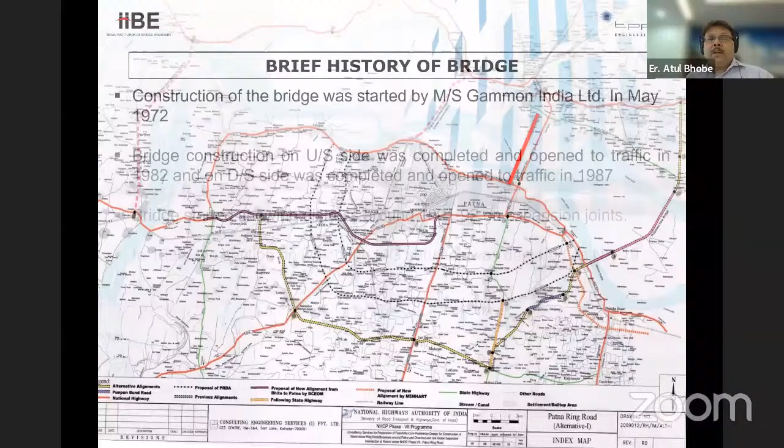So this is a brief history of the bridge. The construction of this bridge was started by Messrs. Gammon India Limited in the year 1972. The bridge construction on the upstream side - this was a 4-lane bridge, not a divided carriageway, but two independent superstructures - was completed and opened to traffic in 1982. It took 10 years. The downstream side took another 5 years. So a total of 15 years were spent in constructing the bridge completely.

Unfortunately, the bridge started showing distress around 1991-92, about 4 or 5 years after it was opened to traffic, immediately on the expansion joints to begin with. In 1996, the section on which the Mahatma Gandhi Setu lies was declared as National Highway 19. The maintenance of this bridge was with the state PWD till 2011.

Various reports on the state of the bridge were prepared, condition surveys were done, and external pre-stressing along with change of central hinge bearings in some spans was already undertaken at that time.

Serious defects and failures in one span, span number P44 on the upstream side, were observed in March 2011, and traffic flow had to be restricted because the span had undergone a complete failure. People could not use the upstream bridge, so all traffic was diverted to the downstream side.

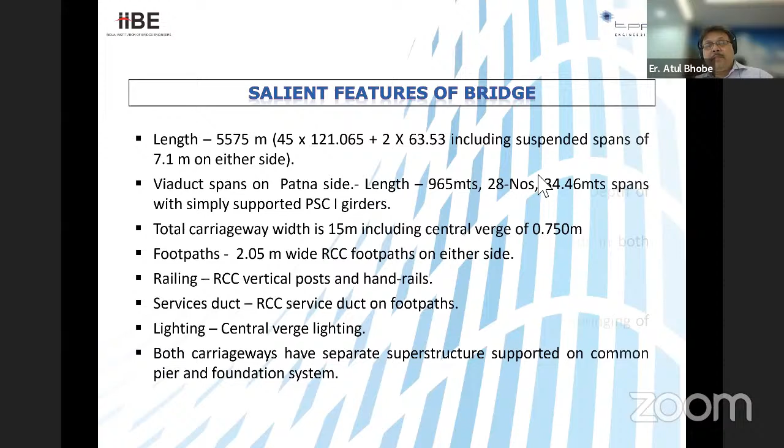The foundation system for this bridge was well foundations. The piers were hollow double D-shaped RCC columns. The superstructure, which was the most innovative part of this bridge, was in precast segmental pre-stressed concrete box elements.

The depth of the box, since this was conventional cantilever construction carried out at that time, varied from nearly 8 meters on top of the piers to only 2.16 meters near the free ends, where there were central hinge bearings. This particular design, with free cantilevers standing out and only a central hinge bearing at the end of the cantilever, was used in several places at the same time with similar spans and similar designs, but this one was one of the early applications of this particular design.

The expansion joints were finger type MS joints. For the moment, bear with me with the English, you will see pictures of these very soon.

The vertical clearance was nearly 11 meters at the pier location at the springing of the box, and of course it was much more in the center of the span because the depth varied from 8 meters to 2 meters. So you had almost 16-17 meters of vertical clearance in the central portion of the bridge.

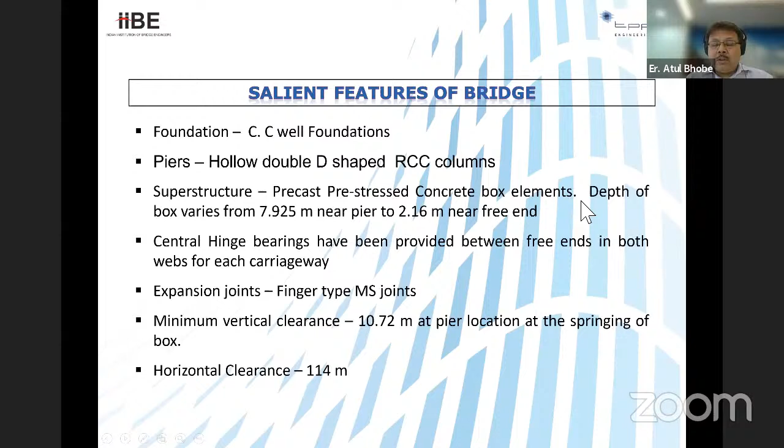The horizontal clearance was 114 meters. I mentioned that 121 meters was the span, so you had well foundations there, which occupied part of the space, giving a horizontal clearance of 114 meters.

So you had this 15 meter cross section, which had 0.75 meters as the central verge as part of it.

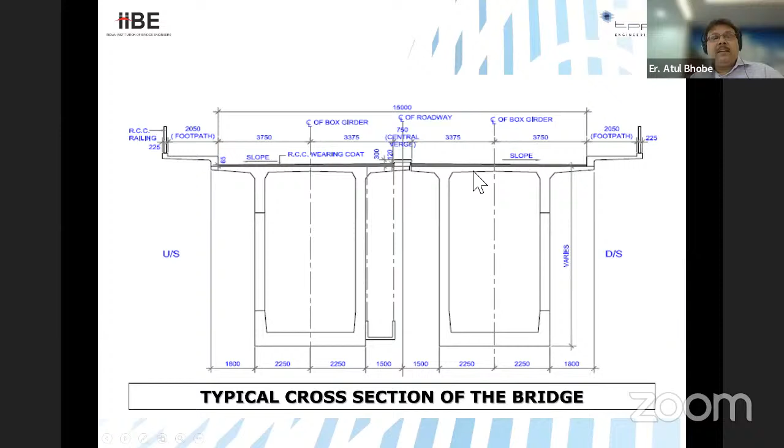The footpath, which sprang out from the box, was different from what we do now. Now, of course, we extend the slab all the way through and create a hollow beneath the footpath, but this was typically a fly-wing kind of footpath constructed in reinforced concrete.

That was the construction method. As I mentioned, there would be a free cantilever, and then a central hinge placed here, making it a propped cantilever kind of design, which made it quite economical.

Now we know that this is the most conventional way of doing balanced cantilever construction, using form travelers in cantilever construction gantries. You have the temporary tower with vertical pre-stressing holding onto the towers, the pier table as we call it now. The pier segment on top was cast in situ, and then the precast segments climbed out with the form traveler.

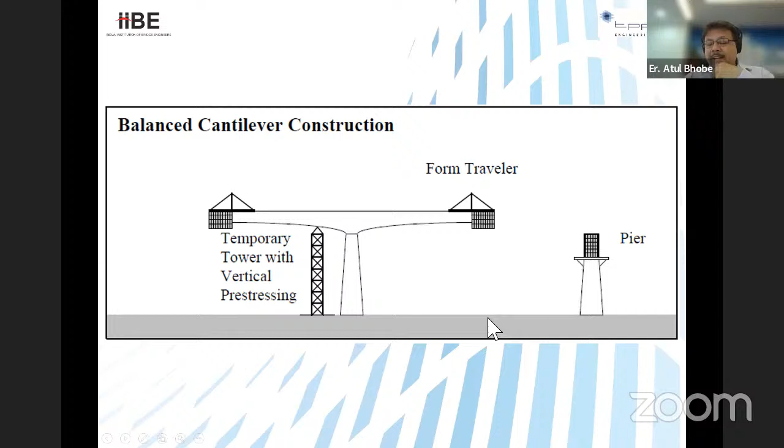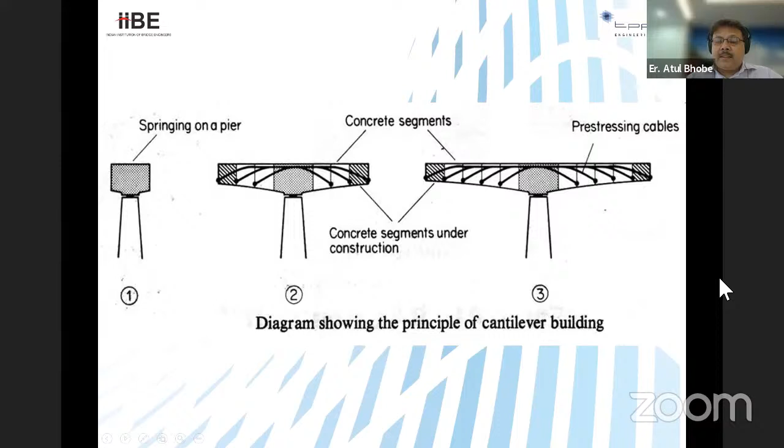That's the principle of the cantilever construction. Very simply put, you put cables in each and every segment so that you can hold the cantilever in place till you reach the end of the cantilever, and then you place the hinge at the center.

That's the theoretical functioning of the hinge. And like I mentioned, you have the propped cantilever effect coming into play. So you have lowering of bending moments, you have adjustment in the shears. So you get benefited in terms of economy in concrete and steel that you would use.

Now, what happens if that hinge does not really function as a hinge, which is where the problem on this bridge started? The hinge started giving problems. And this is what happens when the functioning of the hinge becomes not so ideal hinge condition.

You have differential reactions, and then your structure starts carrying more moment than what it was designed for, more shears than what it was designed for, and then it starts showing distress. So functioning of the hinge, deflection and moment, of course, this is pretty simple.

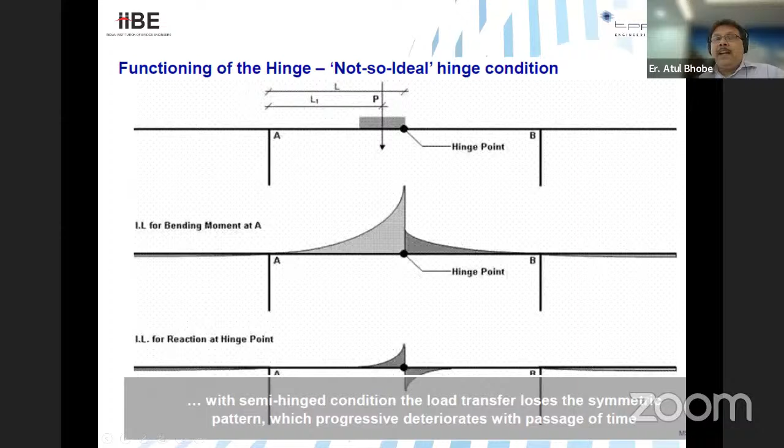And of course, if your hinge is not there, what happens is there is vibration on the structure, which can lead to failure. So just as an example, we tried to see how much a joint of the bridge would move, considering that there is an 8 millimeter movement in every 5 minutes due to a live load.

Movement in 20 years, if you consider differential settlement of 25, seismic effect of 25, loss of pre-stress 25, you will find that your cantilever travels 17 kilometers in a short span of 20 years.

Now that's quite phenomenal, isn't it? Nobody would imagine that your expansion joint is actually traveling that kind of distance in the life of the structure. Well, this is not even the life of the structure, it's just 20 years.

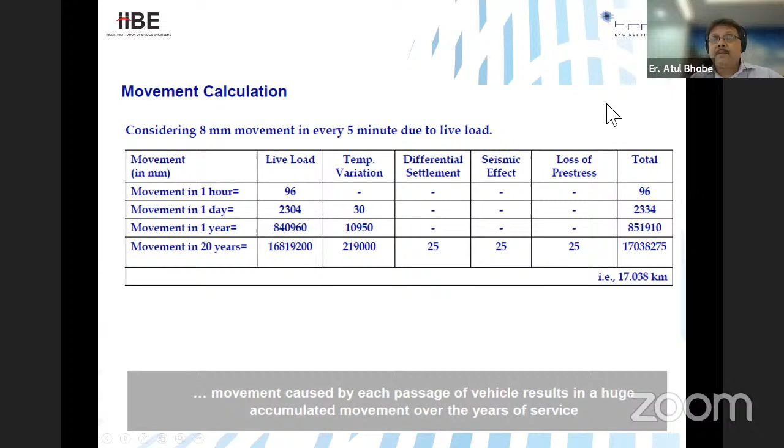So that was an eye-opener for us. I'm going to take you through condition survey and findings of the year 2012. What we found at that time, pretty shocking, as you will see.

So of course, the good thing is that because the bridge was only 15 years old or 10 years old, the as-built drawings were fully available with the department, which is generally not the case. But fortunately, the local PWD, the state PWD had the full collection of as-built drawings. They didn't have a collection of the designs, but fortunately, all the drawings were in good shape.

So to assess the existing status of the bridge, a physical inspection of the bridge was carried out. Now imagine you're carrying out the inspection inside of the bridge. The bridge is 5.6 kilometers on either side. So you have to inspect 12 kilometers of the box inside of the box. And what we found inside the box was pretty shocking.

There was water accumulation at a lot of places. There were all kinds of rubbish lying inside the box. Sometimes the boxes were stinking because of the water accumulation and so on and so forth.

Also, some of the boxes were cleaned because they were already externally pre-stressed. The work was going on. And so they were cleaned because of the contractor who was working on the external pre-stressing.

We had to assess the traffic plying on the bridge. And remember, like I said, the bridge was only open for half its width. So all the traffic was plying only on this part. Heavy vehicles were banned on the bridge. So they had to take a detour of almost 100 kilometers to go from North Bihar to South Bihar.

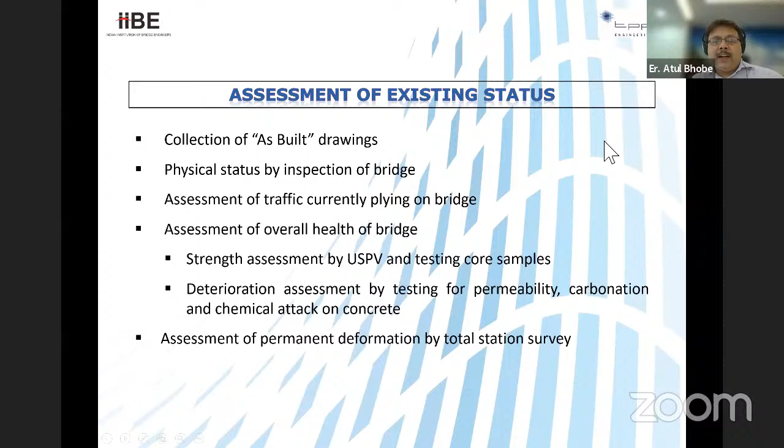And the assessment of permanent deformation was done by a simple total station survey because all the cantilevers had to be checked for permanent deformation.

This was the status of the as-built drawings. As you can see, they were all blueprints. At that time, you didn't have AutoCAD, you didn't have digitized drawings and so on and so forth. So you had blueprints of almost all drawings. And we created a digital trail, a digital archive of all the drawings that we could find, so that this is now available for posterity in the ministry.

We gave them all the drawings fully digitized and archived in a database. Of course, now at this stage it is of no use because the bridge has undergone replacement of superstructure. So the drawings are there now only for history, for people who would want to see how bridges were built in that time and how this bridge was built in its earlier avatar.

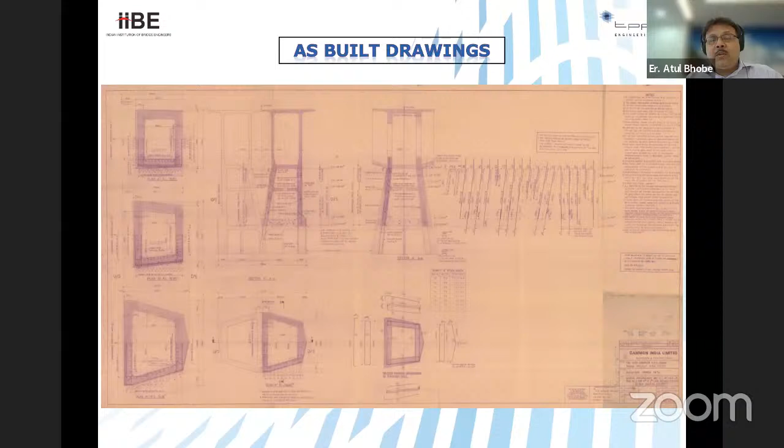So there you have it. That's the substructure and foundation details. And you will see that all the reinforcement details, pretty much everything you would need, a bar bending schedule, everything was available in good condition.

So while inspecting the bridge, condition survey of the bridge, we had to check for serviceability, damage to components, visible signs of distress, closer examination of components which indicated visible signs of distress, and of course documenting the status by taking photographs and doing video shooting.

So how did we do this? From the deck top, inspection of wearing coat, railings, median footpaths, service ducts, and light poles. This is obvious. From the ground, for conditions of piers, well cap, and box girders.

From suspended platforms for selected spans. So we randomly chose spans and we had suspended platforms placed there. We had no mobile bridge inspection units at that time. Of course, the Bihar government did have 2 units available, but they were almost defunct. So we had to make do with suspended platforms.

And like I mentioned, we walked the entire 12 kilometers inside the box, a pretty harrowing experience, and I'll tell you why. We had ladders and scaffolds erected inside the box so that every square inch of the box could be inspected. Central hinges of all the spans were also checked and inspected.

The exposed deck slab portion where the wearing coat was removed was also inspected. So we had wearing coat removed in certain locations where we had a doubt about the deck slab portion. Expansion joints and deck slabs near the joints were fully inspected, and portions of the box from inside showing visible signs of distress was further examined.

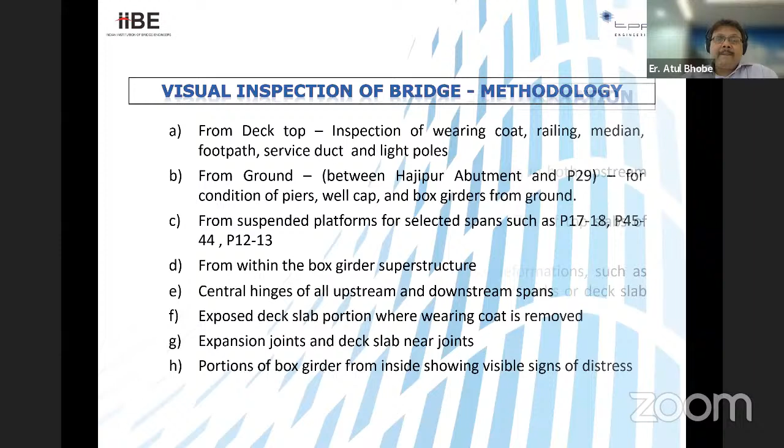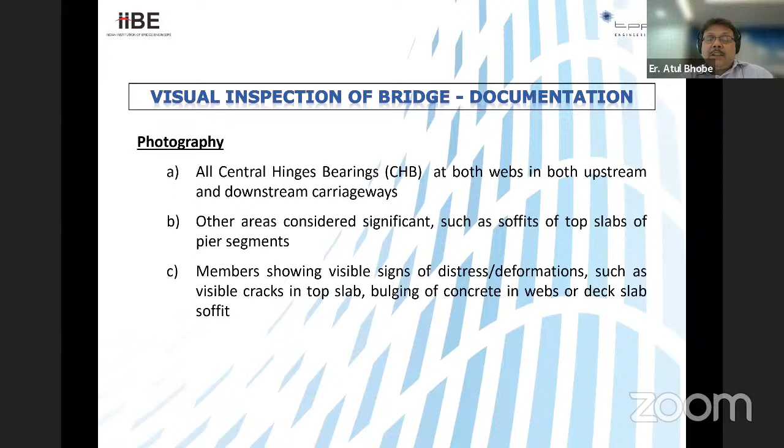So while documenting the details, all central hinge bearings at both webs in both downstream and upstream carriageways were documented. Other areas considered significant, such as soffits of top slabs of the pier segments, members showing visible signs of distress, deformations such as visible cracks in top slab, bulging of concrete, deck slab soffit, etc., were all photographed, and this was made available. In terms of video shooting, all expansion joints were shot.

Video shooting was done. The railing on both sides of bridge in minute detail was also captured. And central hinges in these particular spans were captured because they were showing large distress and the spans were showing large deflections.

Now I will show you a few pictures of what was.

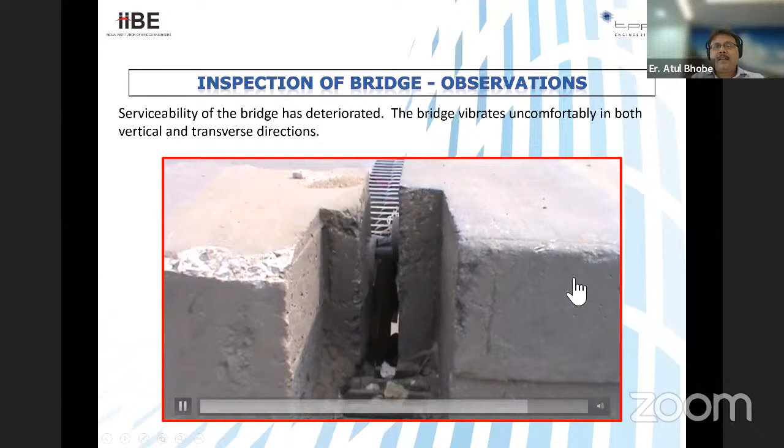As you see, this was just a picture of this expansion joint on piers 41 and 42. If you see the movement of this span, this was one of the better behaving spans. It was moving only by 10 to 12 millimeters. The hinge bearing here had nearly failed, and the span was dropping down, and the vibrations were uncomfortable when you stood here. And of course, remember that heavy vehicles were banned on this bridge.

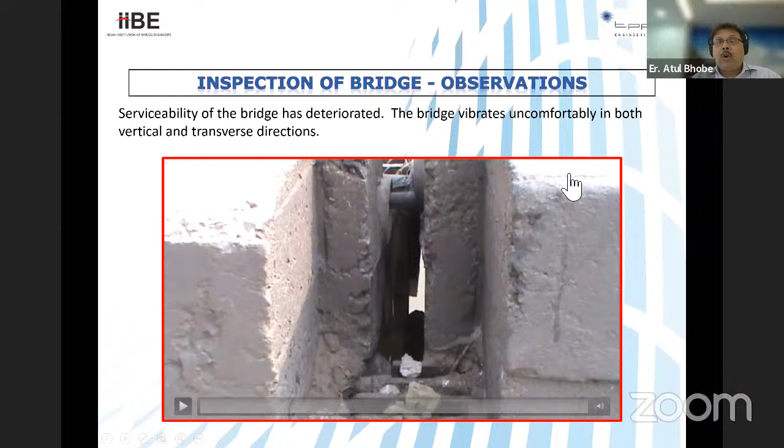So you saw only motorcycles and light vehicles crossing the bridge, and the deflection was already very, very severe when you stood on the cantilever. So this video just demonstrates to you the level of defect, of the serviceability of the bridge. It had deteriorated beyond acceptable limits.

That's the status of the central hinge bearing. Now, this is the plunger, and you see this is the base plate of that central hinge bearing. Many of these were seen to be broken or tilted beyond repair. It was impossible to repair these bearings because you have to take care of almost everything.

So this is, you can see, the expansion joint between piers 18 and 19 on the upstream side. This is the right-hand side carriageway, the carriageway right side hinge. So you can imagine documenting hinges of this. And why I said it was a nightmare walking inside the boxes, because the boxes were vibrating uncomfortably when you used to walk inside the box.

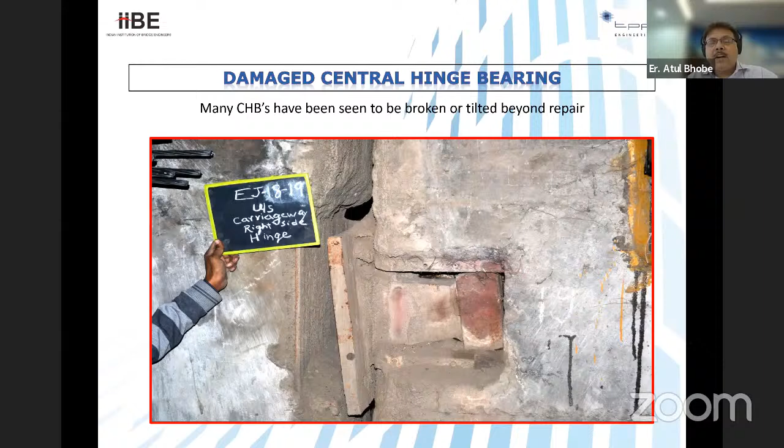The soffit of the box was in the shape of an arch because it went from 8 meters to 2 meters. So you are already doing something like a huge mountain climbing, because in 100 meters, you are climbing 6 meters. It was pretty uncomfortable doing the inspection.

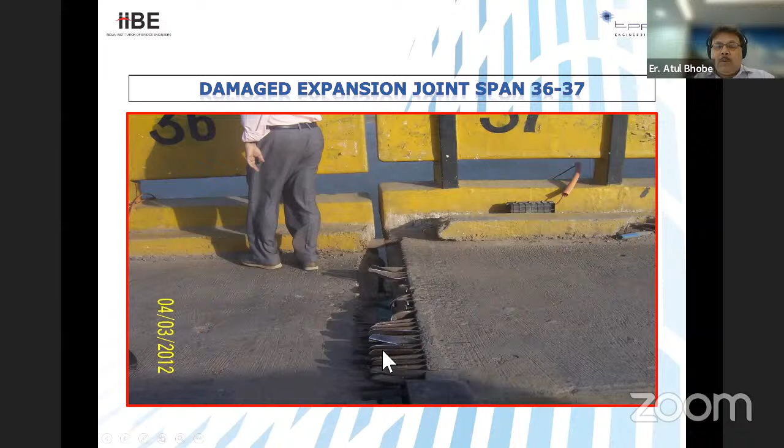That's another span, 36, 37. Now imagine what happens when a vehicle comes from this side and traverses from left to right. A lot of cases of puncturing of tires has been reported on these bridges before we started working on this.

The gap between two slabs, you can see the gap here on the curve. It's nearly 50 millimeters, and heaven help the person whose bike hits this kind of an obstacle on the bridge. This was happening at every expansion joint location. Now this is just an example, 36, 37 is the joint number.

This is what had happened to railings on both sides. Because of the excessive tension that got transferred to these railings, the railings had started to develop cracks. The vertical posts as well as handrails had cracked beyond repair. The railings were broken, they had fallen off into the river. You see these gaps created because this is where the post was and the railing fell off. So here some bamboos were attached so that people don't fall off the bridge.

On the footpaths, you see these suspended platforms placed, which were being used also for external pre-stressing by the contractor. Some of these holes we later used to put our own suspended platforms so that we could inspect the bridge.

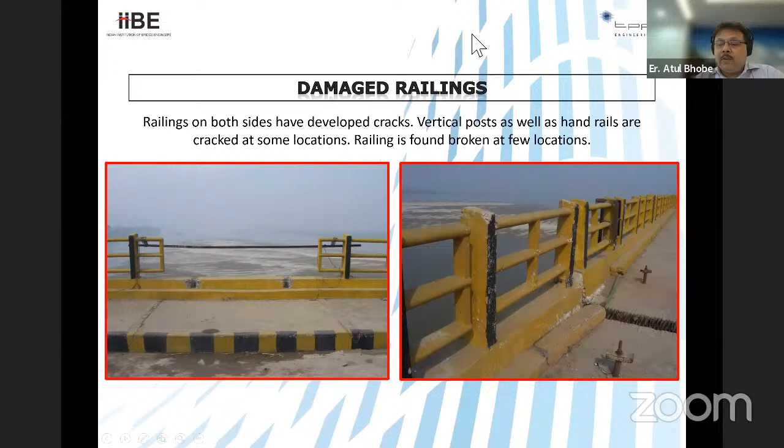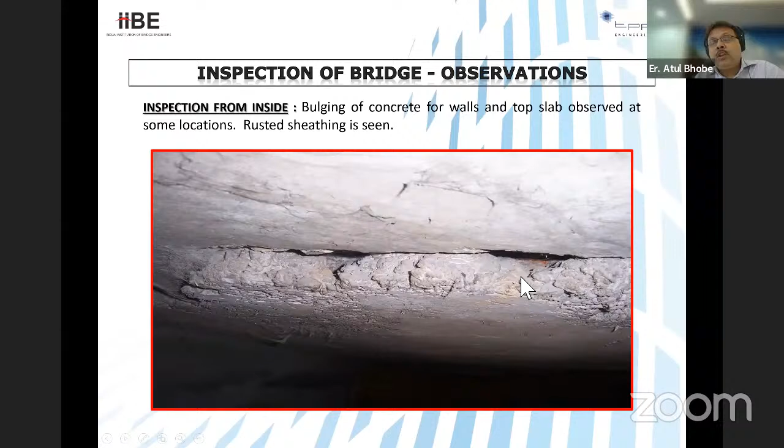Some of the things that we saw on the inside: there was bulging of concrete for the walls and top slab, rusted sheathing where you could see the rust spots, and in some locations the gaps were so large you could put your hand through and touch the cables and feel the cables moving. It was that scary when you went inside.

You see this exposed sheathing which had completely rusted by the time we came into picture. Some spalling had started to take place, and it was pretty scary. Once you started to go inside, you see the water marks, so leakage was happening at these locations. And mind you, this is not the location of the joint between two segments, this was on the top slab of the segment. So it was pretty scary.

For the central hinges, the vertical plates behind hinges were seen detached from concrete and hanging in a slanted position. I showed you a picture already. The vertical plates at a lot of locations had sheared off and torn off from the bolts. Plungers had cracked, and damages to plates below the plunger and to concrete was extensive also.

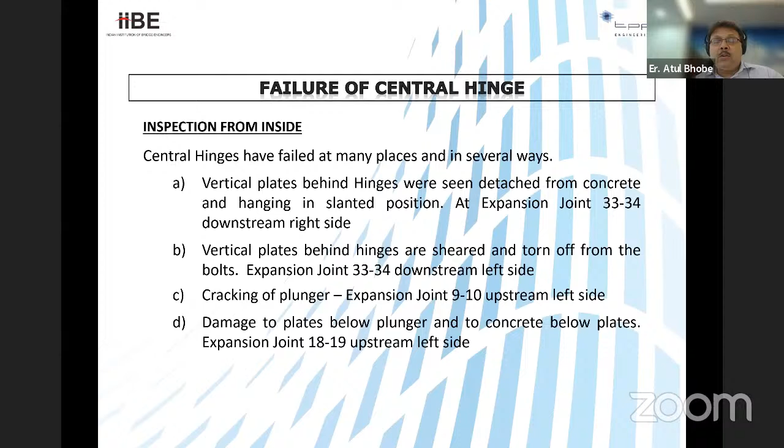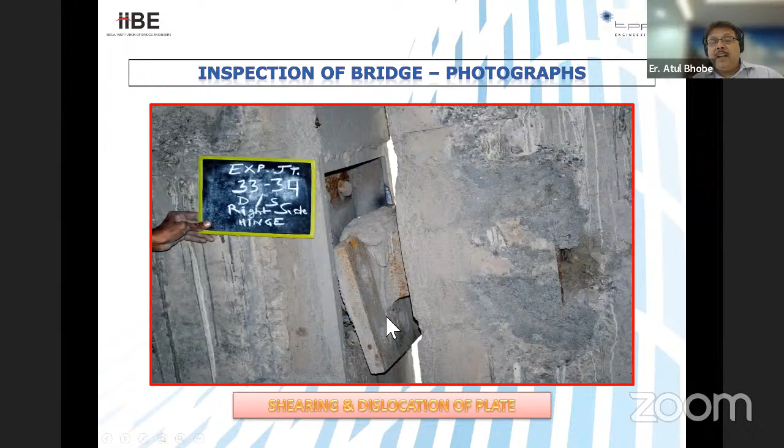That's how it looked. The plunger, the plate has completely come off. The bolts have sheared, the plate has completely come off. It's a dysfunctional central hinge bearing. That's another one that is tilted, and the plunger is still there, but it's not functioning anymore because the bolts have sheared off.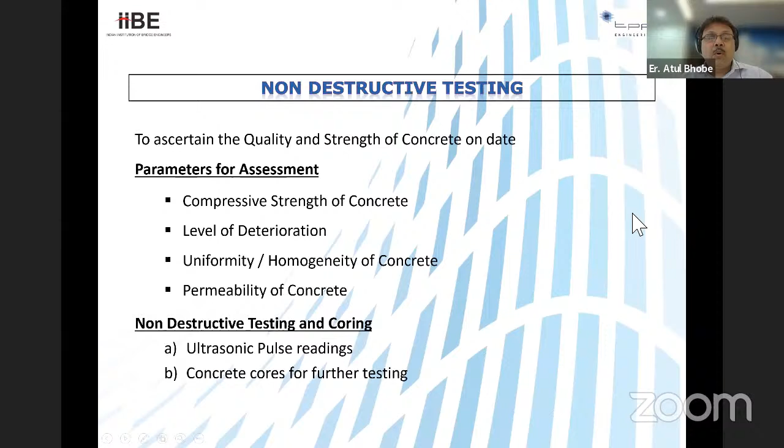Now, of course, I'm not going to talk too much about the NDT that we did, but suffice it to say that a lot of ultrasonic testing, concrete cores, et cetera, was done to ascertain whether the concrete at least had its strength or not. That's a sample of what tests were performed on a span.

So what we found, surprisingly, is that the concrete, which was 30 years old, was still in fairly good condition. The results were in the acceptable range. The core strengths also corroborated what the UPV was showing. Only surface carbonation was observed, which was also considered acceptable. So all in all, the concrete by itself had not failed.

pH values were showing strongly alkaline concrete, offering excellent protection to reinforcement steel. Chloride content was much less than permissible, with very low chloride ion permeability. So as you see, the concrete was good. Chlorides and sulfates in concrete were below permissible limits with very low chloride ion penetration. The concrete is alkaline, uniform, and of okay quality. Carbonation is limited to the surface, not really transferring inside. The concrete strength was unaffected even after several decades of use.

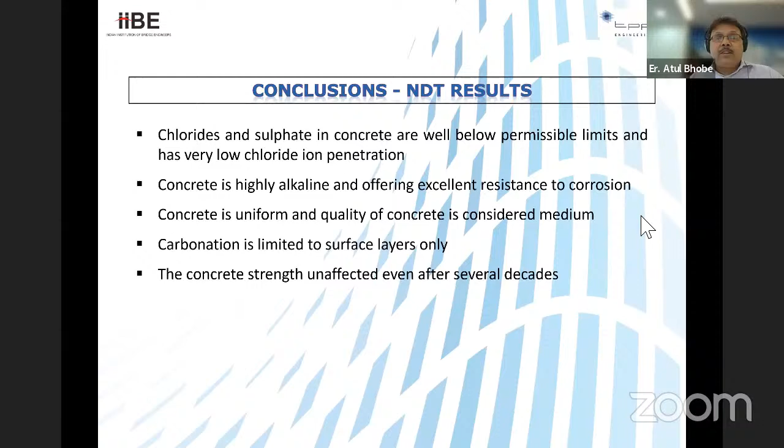There were no foundation settlements. Fortunately, we had the as-built drawing, so we knew the levels. We cross-checked these and there was no change in those levels. Abutments and piers also did not show any visible distress. We also checked the concrete quality and found it okay.

The superstructure, unfortunately, showed considerable deflections, although the condition of concrete appeared good. The central hinge bearings were damaged beyond repair. Signs of imminent failure of hinges were seen in many spans. Expansion joints were also damaged in many spans and separated due to relative deflection of adjacent spans, and corrosion of sheathing ducts in the deck slab was observed in almost all spans.

So regarding the failure of the central hinge, as I showed you earlier, the central hinge is supposed to take the loads of the SIDL and vehicular live loads. The dead load deformations are presumed to have taken place before the hinge is installed. So probable causes for failure were defective installation, or fatigue due to repetitive loading and movement of the hinge under live loads. Remember, this was one of the very early applications of a central hinge design in India — one of the most innovative concepts at the time it was implemented.

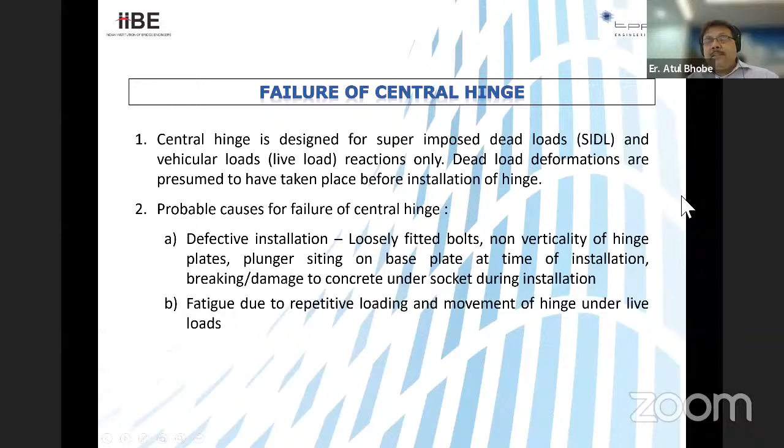Of course, there were other reasons: quality of material, design of the hinge itself, actual deflection being in excess of the design value, deflection of girder due to loss of pre-stress — and we now know that the loss in pre-stress was always underestimated. The last point was that overloading on the bridge could have caused excess load on the hinge, but this could not be corroborated because when we went to the bridge, there was no overloading, as no heavy vehicles were permitted. It's not just one factor, but a combination of all these factors that could have contributed to the failure of the hinge.

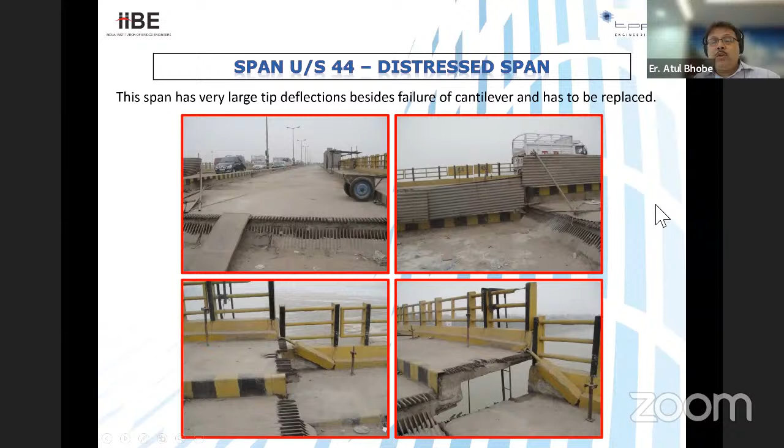Now, the distressed span number 44 — what could we do with that span was the question that had to be answered. This span had large deflections besides failure of a cantilever which had to be replaced. So the first thing we said is that we had to deconstruct the span and then reconstruct it. This was one of the solutions we were looking at.

A segment launching girder would be erected over 2 spans and supported on pier segments, so the girder had to be 240 meters, not 120 meters. Each segment would be strung by HT bars and trolleys supported in launching girders, and after de-stressing the original cable, the segment would be cut loose individually and removed. That was the plan to remove this span, since we decided it had to be removed — we had to re-girder this span. So the answer was to erect a 2-span launching girder, or de-launching girder. There you have it, a 2-span de-launching girder.

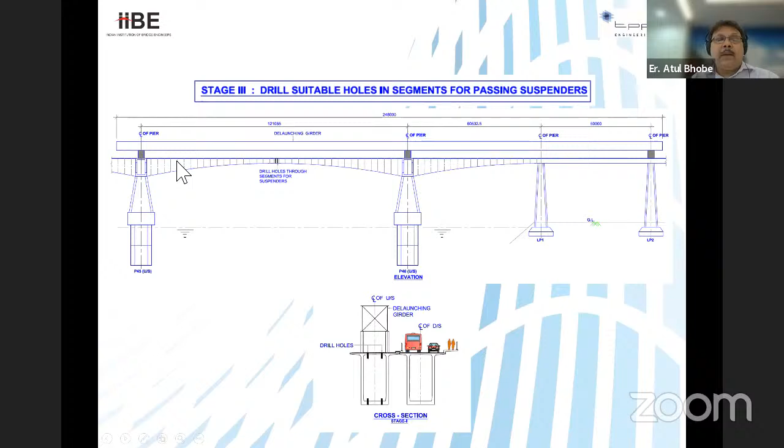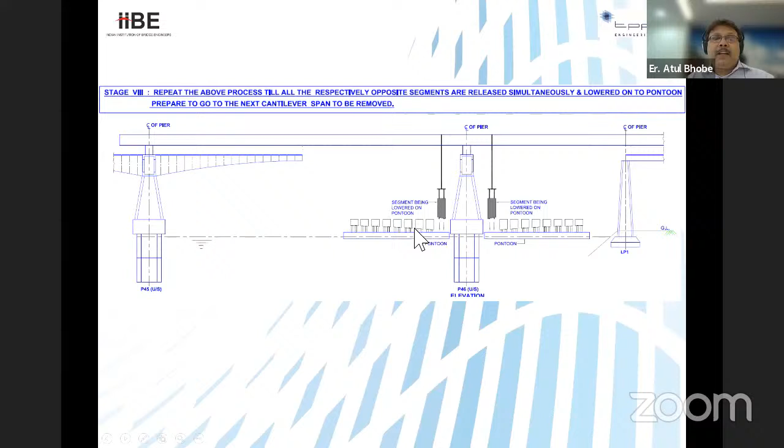We would drill holes through the segments for the suspenders to be provided. We provide suspenders, following an exact reverse process — instead of launching the girder, we are de-launching the girder. So you would do all the steps in reverse, as you would do today to launch a segmentally constructed box. Then the idea was to lower them onto pontoons and remove the span completely from its location, then move the de-launching girder to the next span and remove that span as well.

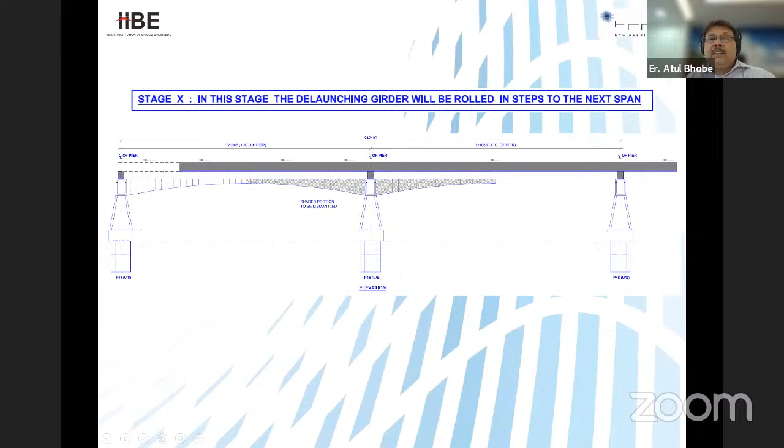We would repeat the same process for all spans. Once the concrete was removed, the idea was to place a truss on top of the already removed box.

Here is the crux of the problem. How would we construct this span? These were the several options we had. The first option was the do-nothing option, where individual segments which had been removed could be reused, or if found unfit, discarded, and only those segments which could be reused, plus new ones cast for those discarded.

This was one solution: newly designed low relaxation cables. Remember, this bridge was designed with old wires and strand systems, so low relaxation strands were not available at that time. We said if we used newly designed low relaxation cables, we could insert those and use gluing with current technology, such as epoxy gluing of segments. Discarded segments could be lowered on pontoons and new segments lifted up from there. But this had a major problem.

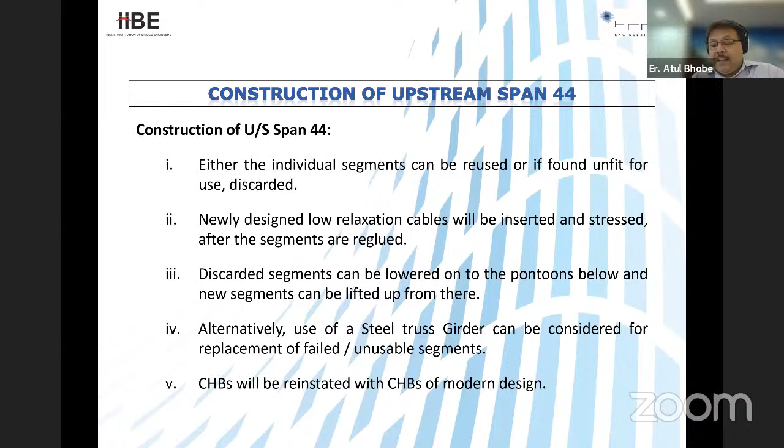One of the problems was that the amount of time this would take would be enormous. So we said if we could use a steel truss girder for replacement of these particular spans, we should and could do it. The central hinge bearings for all the remaining spans could be reinstated with central hinge bearings of modern design. This was the first thought process for the distressed span only.

That's how it started. Then the question was, how do you replace all the other spans? The first thing to bear in mind is that when replacing these spans, we had to consider the serviceability of the bridge and the structural safety of the bridge components which were in distress.

With these two points in view, we started looking at alternative solutions. Since the deflection of most spans was considered to be in the elastic range, we said it was desirable to reduce the load to reduce the deflection as far as practicable. For immediate relief, we could do two things - measures that could be implemented immediately without much difficulty and result in much needed relief, since the structure was already highly stressed at the time we started looking at it.

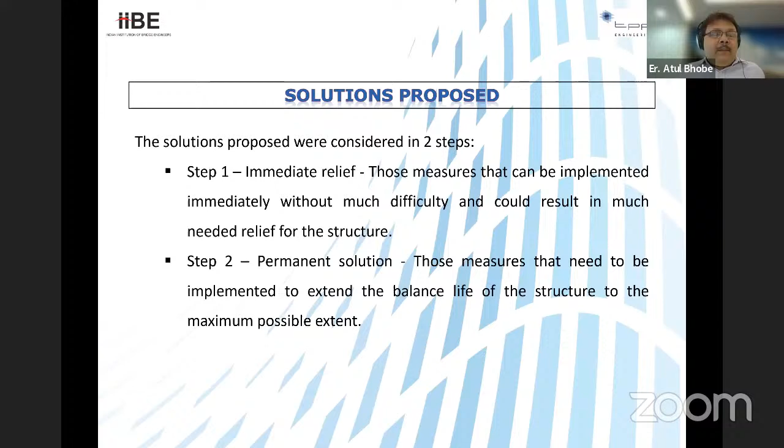Then we had a step 2, the permanent solution - measures needed to extend the balance life of the structure to the maximum possible extent. Everybody agreed that even though the design life of the bridge was say 70 or 80 years at that time, the bridge was not going to reach its design life. So the idea was to see how much we could extend the balance life. At that time, there was no proposal of a new MG Setu, Kachi Darga bridge, or Ara Chapra bridge. The whole solution hinged on repairing and putting this bridge back into service as fast as possible.

So what do we do to provide immediate relief? One solution was to replace the existing 110 millimeter thick wearing coat with a simple membrane and 25 mm thick mastic wearing coat. This would give substantial relief in terms of stress from the superimposed dead load on the span. Also, to reduce dead load, we suggested demolishing footpaths and railings for all spans.

Instead of RCC railings, we put in place metallic barriers which were lighter, with anti-crash barriers of the new type. And we channelized traffic to the center of the carriageway by placing bollards so traffic wouldn't travel eccentrically.

We opened both carriageways to traffic, with only one lane on either side operative, putting the bridge back in service with divided carriageways available to traffic. With some restriction and policing, this was agreed by the local administration. This could be done even before implementation of any other strengthening measures, and it would be easier to implement strengthening measures once the superimposed dead load was reduced.

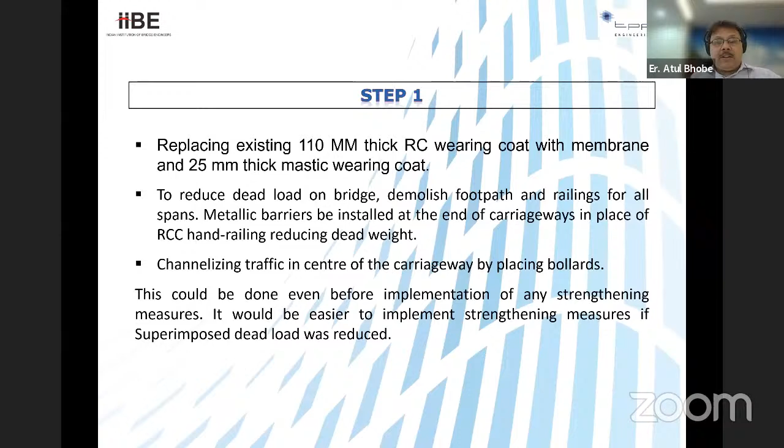This was one of our early recommendations. So that's how it would look. You would remove the two footpaths that were cantilevered. They were adding dead load to the bridge, and an eccentric dead load at that, and replace them with simple anti-crash barriers, steel anti-crash barriers, and then reduce the thickness of the wearing coat. That would reduce a substantial amount of weight. That's how it would look with these bollards.

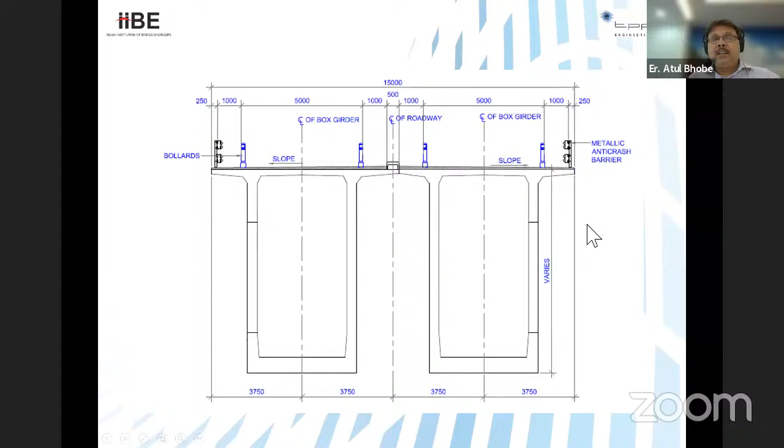So you had a 5 meter carriageway left in place. You had 1 meter on either side which would be defunct, and we would use only 5 meters. So one lane of vehicles and maybe 2-wheelers or 3-wheelers could use the bridge simultaneously. So we had 10 meters of carriageway available.

So one of the immediate relief advantages was a reduction in superimposed dead load by almost 2.5 tons per meter, leading to a bending moment reduction of nearly 4,500 ton meter, which was 10% of the total bending moment. So the reduction in stress was of the order of 20 kg per cm square - a substantial reduction in stress. Also, it would reduce eccentric loading and transverse vibrations. The video I showed you was not perhaps very clear, but the span was moving up and down and in the horizontal direction as well.

The disadvantages of this were the reduction in effective carriageway for traffic, and traffic diversion would be needed during implementation. This was one of the most critical items for the local administration.

We came to permanent solutions, and like I mentioned, we looked at several solutions for this. One was replacing the central hinge bearings with modern design central hinge bearings and externally pre-stressing the spans which had not yet been externally pre-stressed. Almost 40-50% of the spans had been externally pre-stressed by the time we looked at the bridge, but we thought we would also externally pre-stress the rest of the spans - replacing CHBs with pre-stressing or other alternate means to connect the superstructure and convert it to a continuous portal frame. So this was solution number 2. What we thought is that if we converted the cantilever construction into a continuous portal frame by removing the central hinge bearings, adding pre-stressing which would take the shear and the moment created, then we could convert the superstructure into a continuous portal frame. This was the second solution.

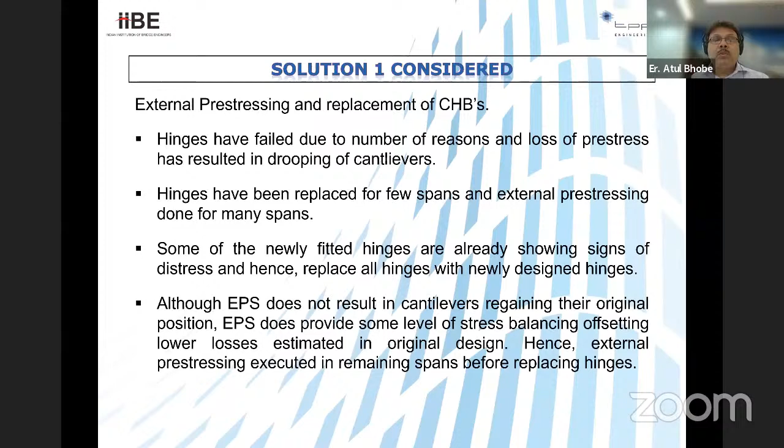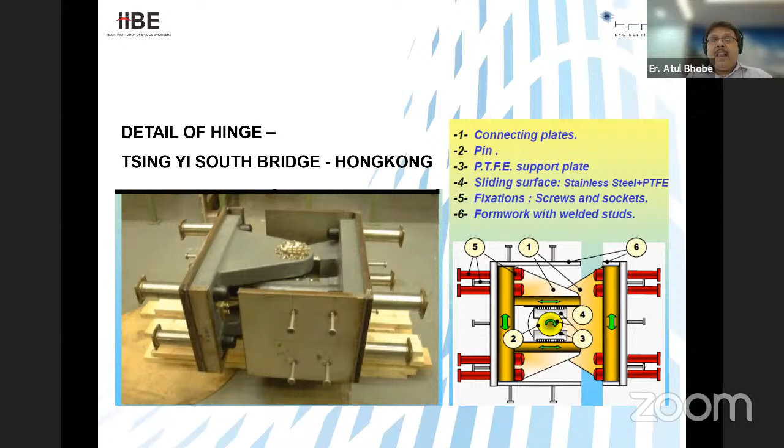These were the 6 solutions that we looked at. I'm going to show you also - yeah, so this is the first solution, external pre-stressing and replacement of CHBs. I'm not going to go through too many of these details because it's a long drawn presentation if I start talking of central hinge bearings. This part of the presentation talks about the new generation of central hinge bearings which came into play after the first lot, the first generation that we had used in the MG Setu, the first MG Setu.

So you had all these solutions also available. The second solution, like I mentioned, it's a combination of the second and third, where deflections were large, more than 25 millimeters, where we needed an alternate solution, and hence the following options were studied.

Can we make the spans continuous, making one span continuous, making multiple spans continuous, etc. Because we would establish continuity, large moments would develop at mid-span, where there is a disconnect now because there is a hinge bearing. This will be required to be connected. And also moments on piers would increase as compared to original design. What we found here is that the girder section was inadequate for the large bending moments created at the disconnect. The girder depth there was only 2 meters.

So almost 100% of the moment and shear would have to be carried by the extra pre-stressing or the extra steel that we would have to put. So we dispensed with this solution. The options for creating connection at the disconnect were post-tensioning over the disconnect, PT slabs, PT bars, but the depth and space was inadequate for the amount of PT that we needed.

A stiffening girder connecting the 2 cantilevers, what today is being called a needle beam, is what we had suggested in 2012. A stiffening girder connecting the 2 cantilevers leads to a complex structural configuration. Also, bringing the 2 cantilevers to the same level of deflection was an unresolved issue because almost all places, the 2 cantilevers had dipped unequally.

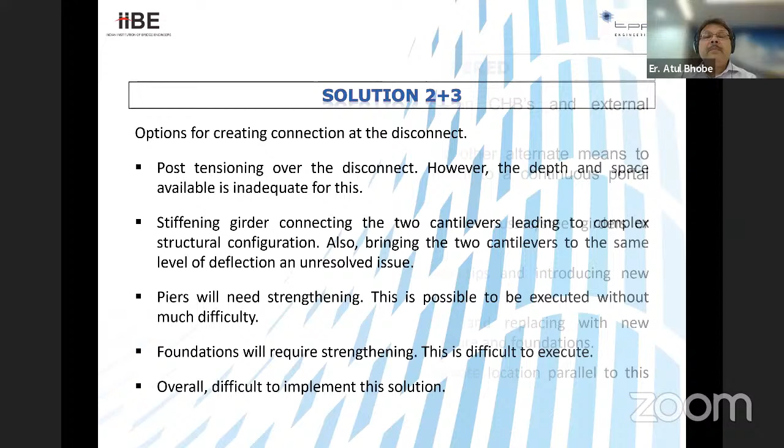Navigational span piers cannot be constructed, and hence various other options were studied. So this is one of the solutions, to add a pier here and put a bearing below it so that this span becomes a propped cantilever, which was more or less the original design.

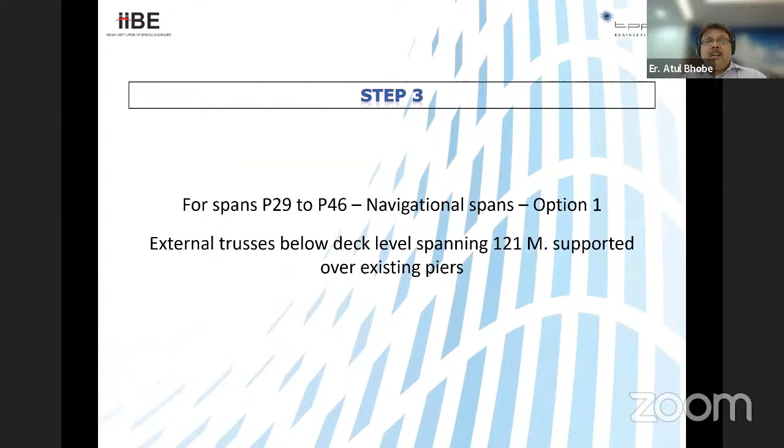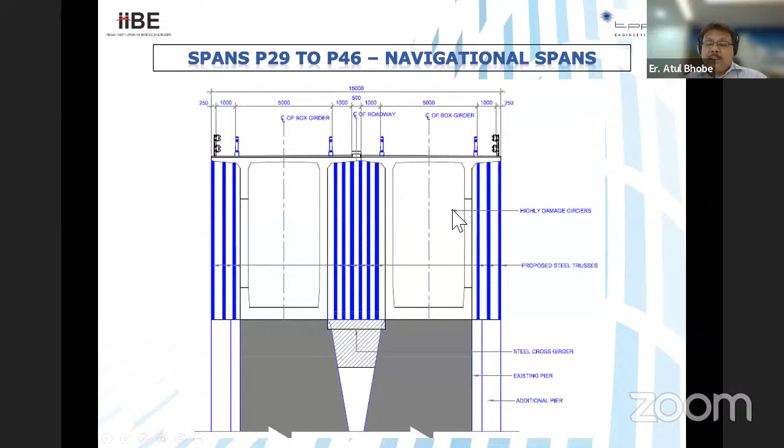For the navigational spans, what we thought of is to put steel girders inside these, make this box girder completely defunct, which was highly damaged, highly deflected, but we needed them so that the wearing surface and the top slab could be retained. So we designed simple steel trusses which would go under this, and the slab would span between these trusses. This was a solution that we would use for navigational spans.

Another solution was to put in an extra-dosed solution with trusses inside it, which would carry the box. That's the box girder line. But we would put trusses instead of composite spans, and we would extra-dose it. And then you would need only 3 trusses instead of all those trusses that you saw in the earlier span.

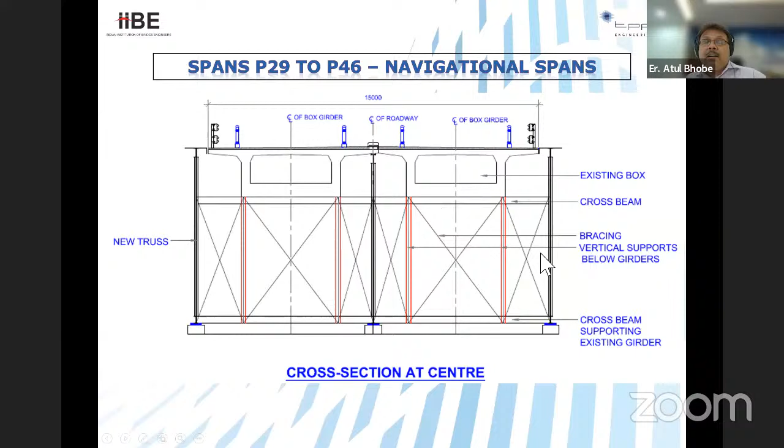For the navigational span, this was another solution that we thought of. This is the cross section at center. We put additional trusses, we brace them, and we add load. We take the load of the box at the center with these trusses.

Of course, reconstruction is one of the solutions that we looked at. And when we looked at reconstruction, now you have seen the progression of how we came to the logic of reconstruction of the superstructure. So we have looked at several other solutions where we have tried desperately to keep the bridge as it is with minimal dismantling.

Why were we doing that? Because Ganga is a very sensitive, environmentally sensitive river. And the idea of putting debris inside the Ganga while dismantling the superstructure was not a very enthusiastic idea at that time. We were asked to refrain from putting dirt inside the Ganga unless it was absolutely impossible to do anything else.

So the 5 solutions that you have seen before this one were with a view to see if we could save the bridge without dismantling it. But once we came to a conclusion that none of those solutions would extend the balance life of the structure, we had to come up with a solution which would have the same balance life as the substructure had, because the substructure, in our opinion, had the complete design life, let's say 80 years or 100 years.

If we had put in place a solution for the superstructure which had anything less than that, it would be doing injustice to that structure. One of the logic behind the reconstruction was to come up with a final solution which would have the same design life and service life as the substructure, maybe 100 years or more. Once we established that the concrete was of good and consistent quality, especially in the substructure, with no deformation and no scour, we concluded that only the superstructure would be replaced.

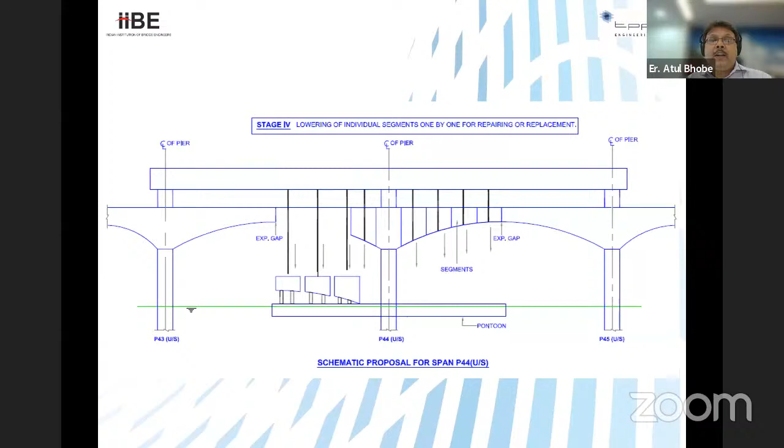I'm not going to run through this again, you've already seen it. This is the de-launching girder and how we would have done the de-launching at that time. So this was what we had proposed.

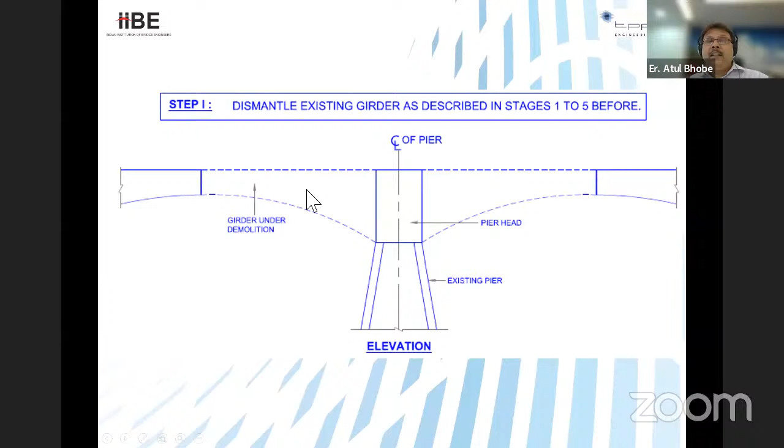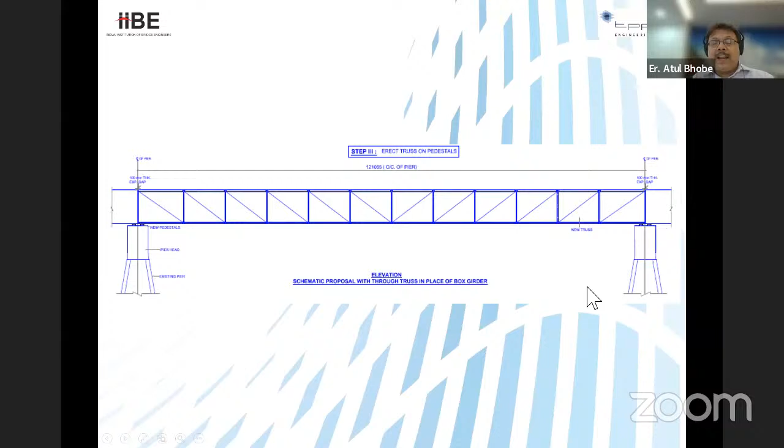We erected a truss on top of the pedestals so that we could nearly match the FRLs of the existing bridge. Of course, they didn't match exactly—we had to slightly raise the FRL because of the bottom boom of the truss. It was mandated that we could raise it by about 1 meter, because fortunately on the approach side at both ends we had spans that could be lifted through that 1 meter with a shallow slope provided. So we decided to erect trusses.

You can imagine this is in 2012. If you see the bridge now, the section is very, very close to what you're seeing in this particular slide.

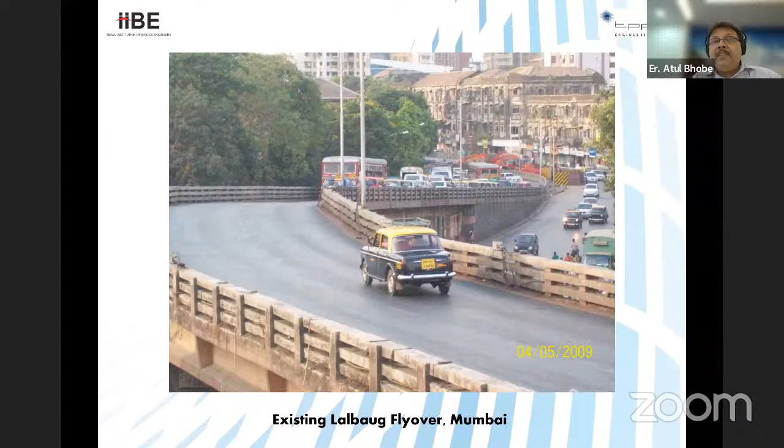Once we reached this point, the question was how do you dismantle a pre-stressed concrete, post-tension box girder? Fortunately, we had the experience of dismantling a similar flyover in Mumbai, also a pre-stressed concrete span. We had dismantled it in 48 hours by cutting it away, and this was used as an example to demonstrate that we could cut this bridge.

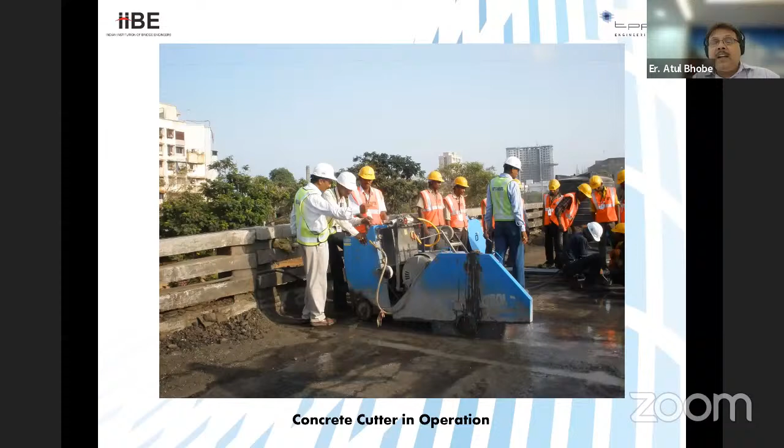Here you see cutting away the slabs. I'm not going to take too much time, I'll run through these slides quickly. There you see we have cut open a slab. We could completely sling it and remove the slab without creating too much dirt or debris on site. So we cut open these slabs and then used crushers.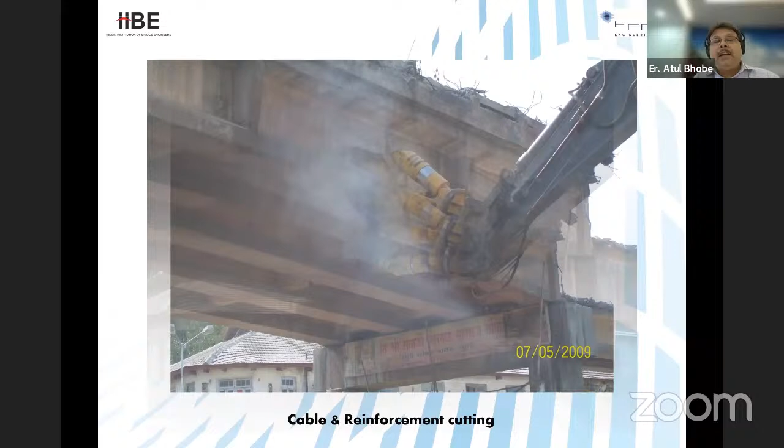The crushers simply bit through the PSC girders. Those who believe PSC girders cannot be dismantled because of very high stress—that they would crack open from compression and so on—we dismantled that myth along with this crushing of concrete. There you see the crushing, and the cables being pulled apart. You can see the cables here. So we simply crushed and bit through the concrete without any damage at all.

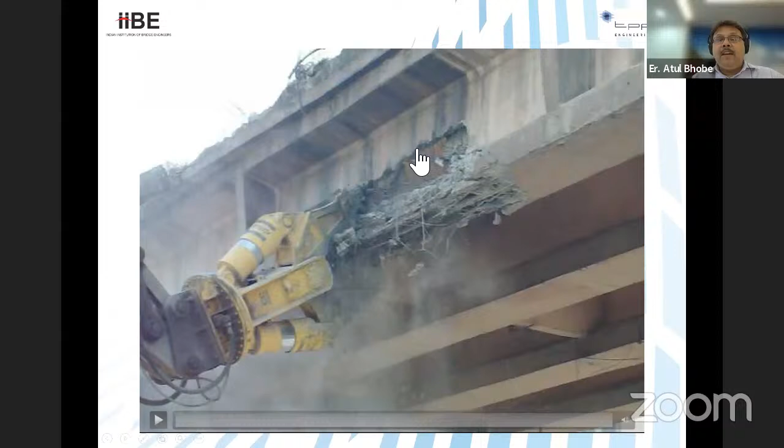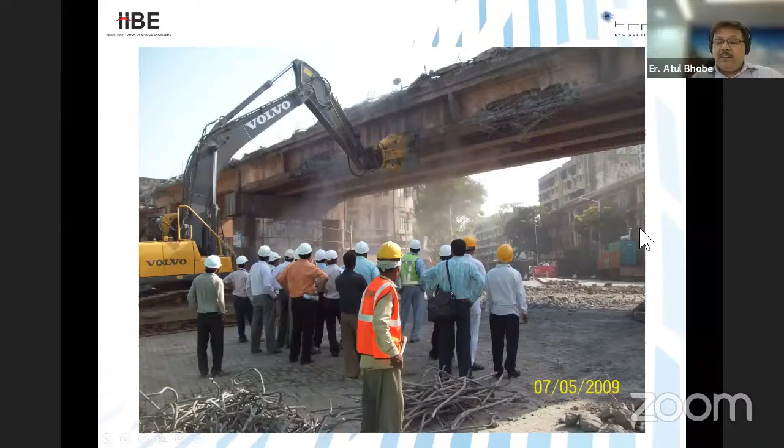You can see we bit through the flange and the web, and there was absolutely no damage to the structure—it didn't fall down. You see people standing in close proximity while this was happening, with absolutely no problem. We had firemen dousing the crushing because it created a little bit of dirt.

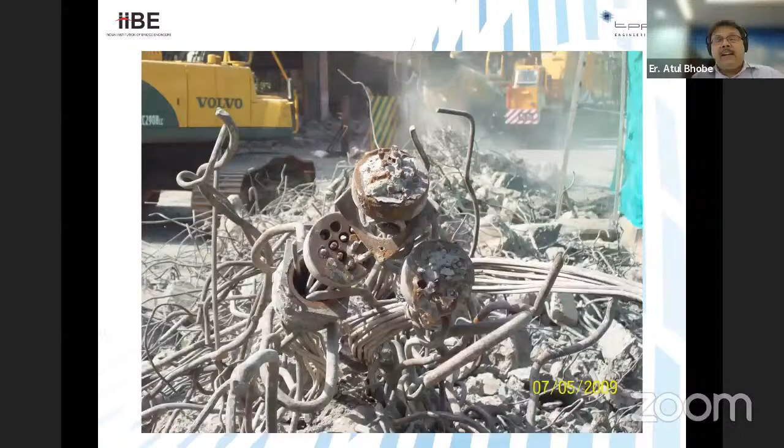Then we did that. There you see we bit through the whole span and dismantled it. We removed the girders. Here you see the cables, the stressed cables, removed completely and kept aside, sold as scrap.

So that's the new superstructure GAD.

You see how we would do it. You had the truss on one side, you had the cantilever footpath, and then you had the truss on both sides, connections at this place so that we could hold the whole thing in place together.

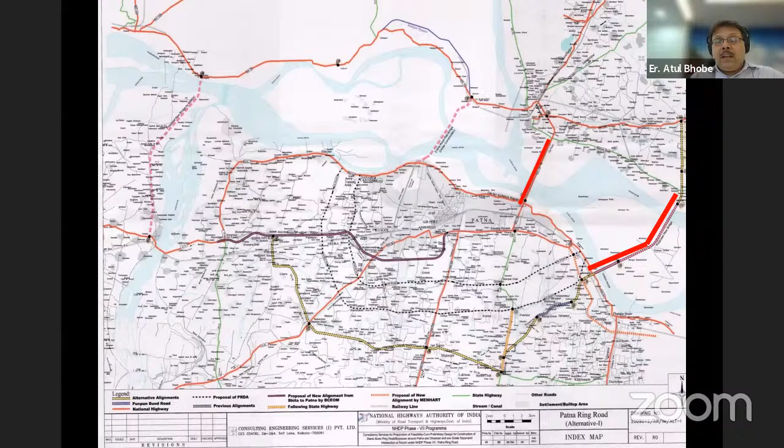So of course, that's the Kacchi Dargah bridge, which is now under construction by another agency, by the state government, on a BOT. But this bridge was therefore replaced with steel. This presentation is actually talking about the Kacchi Dargah bridge, so I'm not going to go into that. Let me run through this presentation.

So finally the solution was to replace the distressed span, replace the superstructure of the existing bridge, and construct a new parallel bridge by the state government - that's the Kacchi Dargah. By the time we finished this, the government also agreed that a bridge parallel to MG Setu would be required, because already 4-laning and 6-laning of this section was proposed. So now the bridge parallel to MG Setu is also being constructed along with the regirdering of this bridge.

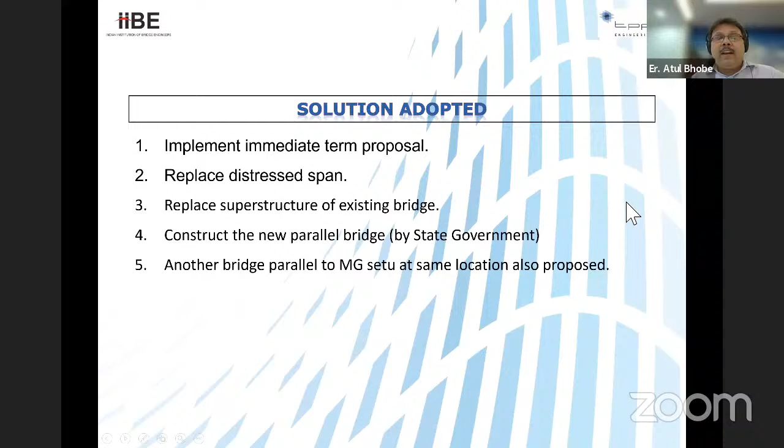That brings me to an end of this presentation, but I want to share a little bit of insight into the steel. While we finalized this DPR and submitted it to the NHAI, which transferred the work to MoRTH, what happened in the meantime is JICA entered the picture, and JICA suggested that instead of using conventional mild steel, it may be better to use weathering steel.

Now, weathering steel was something that was not available in 2012-13 in India. So the idea was to get this funded from JICA, and then Japanese steel would be used. With that in view, the tender was finally floated with weathering steel.

Unfortunately, when we started construction of the bridge, weathering steel was not available. We finally had to construct only 8 or 9 spans, I think, of the 96 possible spans - about 10% of the bridge is constructed in weathering steel. It took a long time because supply of weathering steel was a problem.

And the remaining 89, 90 spans have been constructed in E450, E410 steel, and not weathering steel. So conventional steel has been used, with the weathering steel replaced by conventional steel, with metallizing and painting over it for aesthetics.

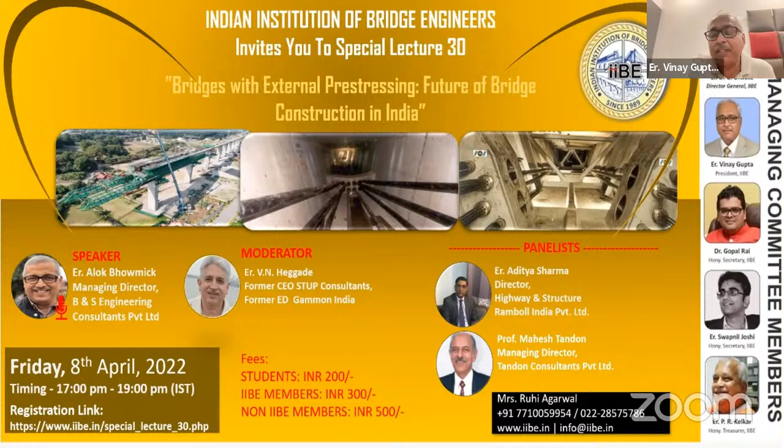Yes sir, Ruhi will be doing the vote of thanks. I'm not seeing her, Ruhi, are you with us? You are muted. So Deepika, all yours in that case. Deepika? Yes sir, just checking. Hello, yes. I'll just propose the vote of thanks on behalf of Ruhi. Just a second, sir.